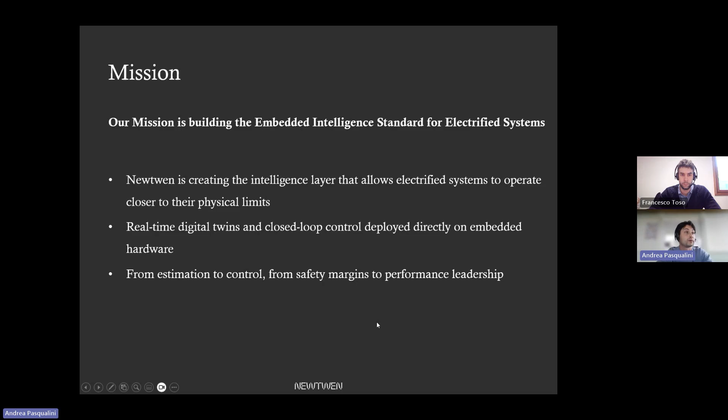Now, maybe we can ask ourselves why now? The answer is simple. Electrification nowadays is pushing everything to the edge. Power density is increasing, thermal constraints are tighter, and efficiency targets are more demanding than ever. Yet many systems are still relying on heavy derating and oversizing just to stay on the safe side. At the same time, embedded computing power has reached a level where real-time multi-physics models can actually run on microcontroller units. This combination is changing the game. Performance is no longer just a hardware problem, it's becoming a software-defined advantage.

So this is where Twin Fabrica comes in. For those who don't know, Twin Fabrica is our software platform that generates real-time, embedded-ready digital twins. Starting from CAD geometry with material properties, simulation data, and test bench data, Twin Fabrica is able to create high fidelity thermal and multi-physics models designed specifically for real-time execution inside the control architecture. Bear in mind that Twin Fabrica is not an offline simulation tool, it's built for real-time deployment.

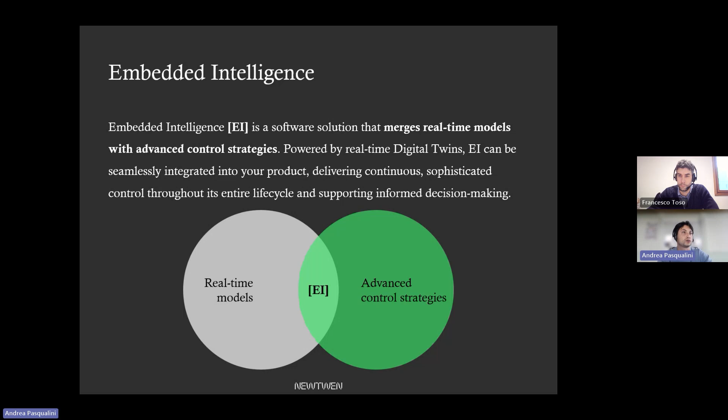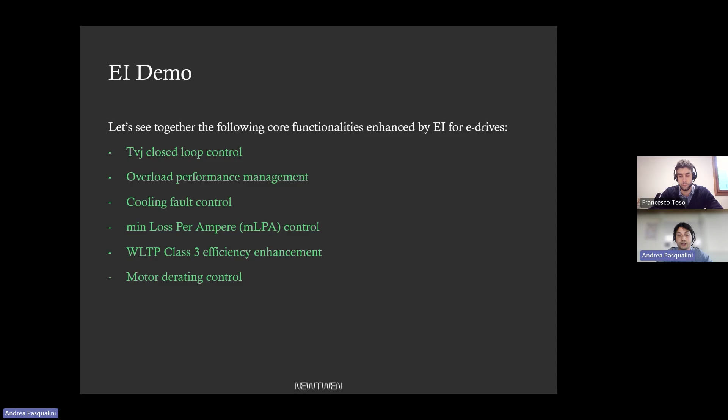Then, in the demo part of this webinar coming in a second, Francesco will show how this translates into concrete value for e-drives. We looked at closed-loop junction temperature control, overload performance management, cooling fault handling, min loss per ampere control, WLTP class 3 efficiency improvements, and intelligent motor derating control. All of this is enabled by real-time digital twins running on the edge and generated by Twin Fabrica.

Now, with that, I'll hand it over to Francesco, who will guide you through the full workflow from model generation to embedded control library, and show you how this approach can redefine motor control for the next generation of electric drives. Francesco, over to you.

Thank you very much, Andrea, for the introduction. Can you hear me well, right? Yes, loud and clear. Great.

So let's start. I would say that you have perfectly summarized what embedded intelligence is. Basically, it's a firmware layer that we implement in the microcontroller units of electric drive systems, like in this application example. It's composed of mainly two components. One is formed by real-time running models, and we will see how Twin Fabrica, the software engineering platform we have created and deploy to our customers, is used, and how easy it is to create these real-time thermal models. Secondly, there are algorithms for decision-making control in order to improve the electric drive motor control application.

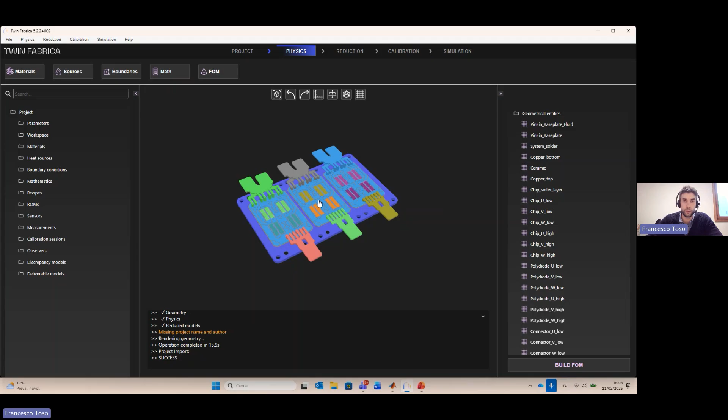So what can you do inside Twin Fabrica? We will briefly summarize all the steps reported here. First, you need to import your geometry, so you're capable of reading CAD files, and also capable of meshing your file, creating and generating the mesh of this geometry in order to perform finite element analysis.

Why perform finite element analysis? Because it's the foundational, high fidelity model that is the base of our real-time running digital twins. Unfortunately, finite element models, finite element analysis, CFD simulations - whatever high fidelity model you create - usually aren't deployable inside a microcontroller unit because of memory and computational effort needed to solve the partial differential equations related to each node of the mesh. We're talking about millions of degrees of freedom usually.

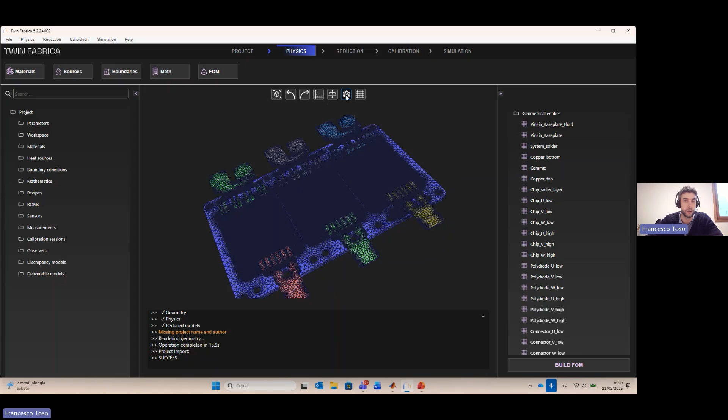So inside Twin Fabrica, you can perform a reduction. You can use our model order reduction library to compress the high fidelity degrees of freedom, on the order of millions, from the finite element based model into a compressed reduced order model, always physics based and in a state space form.

With this part of the software, in an easy way, just pressing a few buttons and setting model order reduction tolerances in terms of error and accuracy with respect to the full order model - the FEM - you can compress your model into a set of 40, 50, or 30 differential equations, depending on the settings you decide, which must be real-time suitable for embedded application. So you can execute a model inside a microcontroller unit without losing the accuracy of a full FEM.

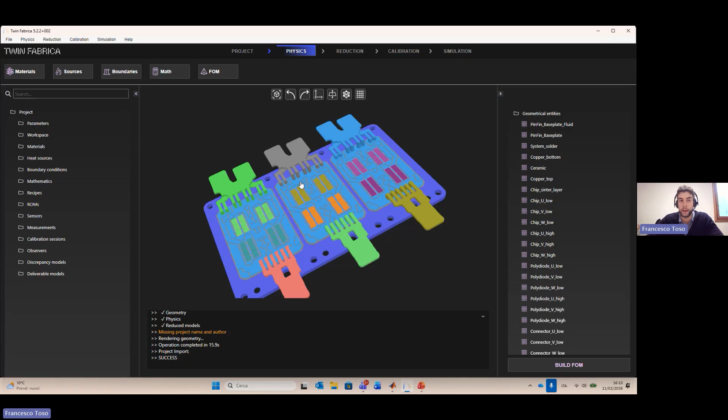But that's not where we stop - we do much more because we also calibrate. In the calibration procedure, you can import measurements like we can see here. We can import a set of tests that I can run in my test lab, for example.

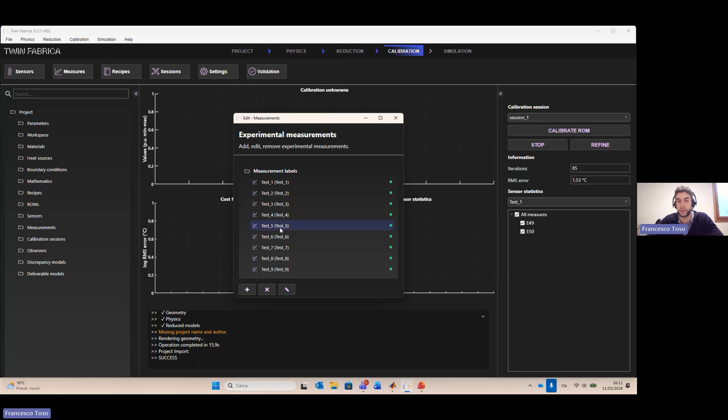Let's look at how, in this case, a test was performed using IR camera estimation. I can record the currents, DC voltages, the polydiode sensors implemented in the body diode, as well as the junction temperature recorded with the IR camera.

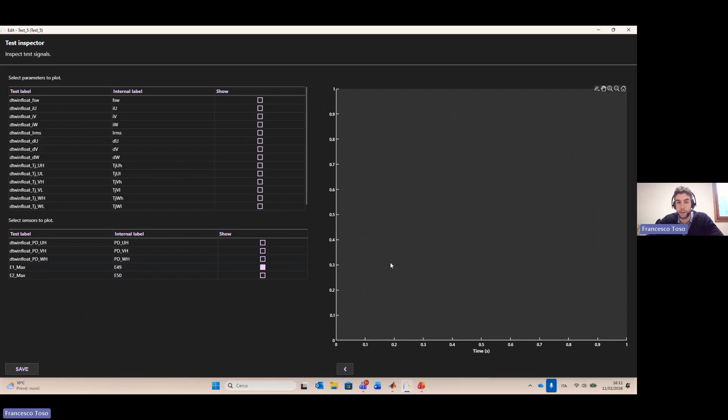I can see how the measurements behave during transient operation if, for example, I change the current level of my inverter - passing from 100 to almost 600, like in this case - I can see the junction temperature recorded with IR camera, which varies between 40 and 130.

This transient test, in this phase, is used to calibrate and enhance my reduced order model such that it can perform with very good accuracy.

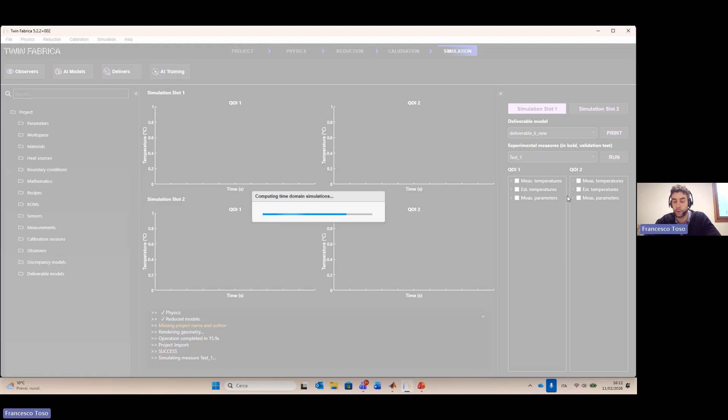If we look at test number 1, I can make a comparison after calibration between my reduced order model and my test bench data, in order to see if the degree of fidelity and accuracy of the prediction of my reduced order model is sufficient for my application.

So here I can simulate and report the test. Let's advance this one second. Here you can see the accuracy that you can achieve. If we zoom in on a certain test, we have 4 signals in this case.

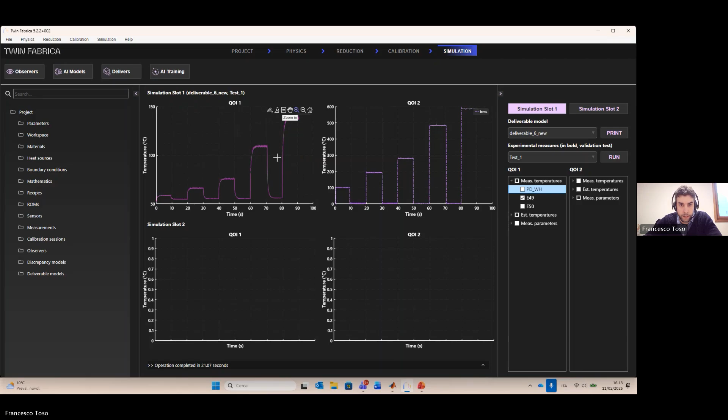Let's zoom here. The dashed line is the model, the continuous line is, let's say, better to see like this. You have a clear comparison between the real IR camera measurement and the dashed line, which is the estimation of the model.

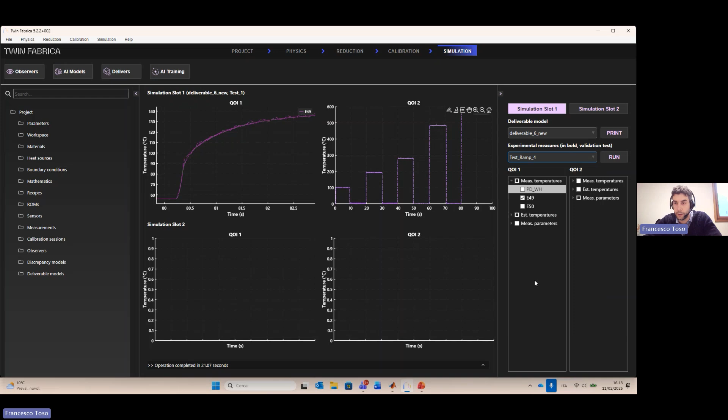You can also perform different tests between the one that has been recorded. Let's see, for example, a ramp, the classical hill hold motor start, where we can clearly see in this junction temperature, if we zoom in, the kind of accuracy between an IR camera measurement, measuring also the swing of the temperature when the frequency of the motor is low, and in dashed line you have the estimation of the model.

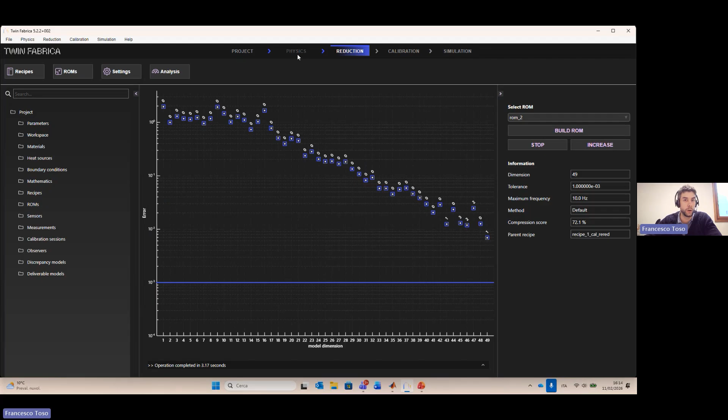Once you're satisfied with the accuracy obtained during the calibration, inside Twin Fabrica you can train AI models which basically work to correct the state of the physics-based reduced order model, which is foundational based on FEM models.

You can go back and export this final model into your platform. I can decide to export into different formats, into Simulink format, like we will see in a moment, or also as a C code function, which is plug and play into my firmware library.

So let's see the Simulink. We will export deliverable 6. We can also, for example, export it with some tests in order to have the final confirmation. If we go here and select this...

Now the software has generated this Simulink file, which I can open into my MATLAB. Let me position into this path and clear everything. I can open the Simulink.

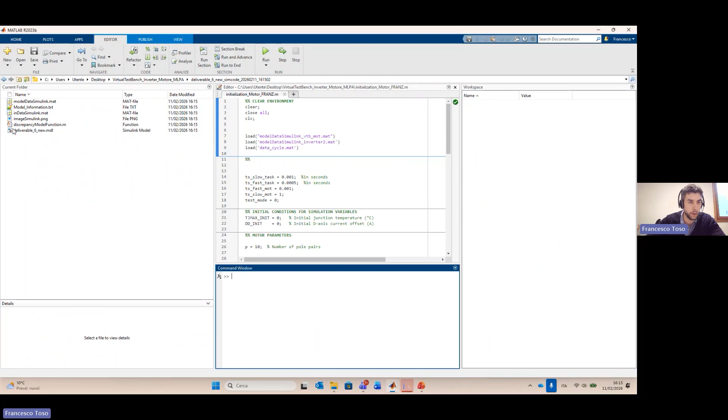Here I have the block with my digital twin exported inside. So if I run it, I will run the test ramp 4 that I have exported with. Once the Simulink has compiled...

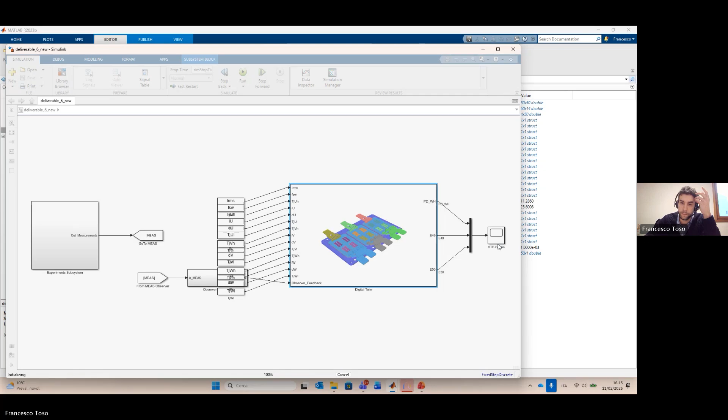I can exactly see the variation of the swings in the points that I have exported, and also how fast it is. The input and output of this Simulink block are managed directly by the Twin Fabrica interface, so for example I can position multiple sensors, not only 3.

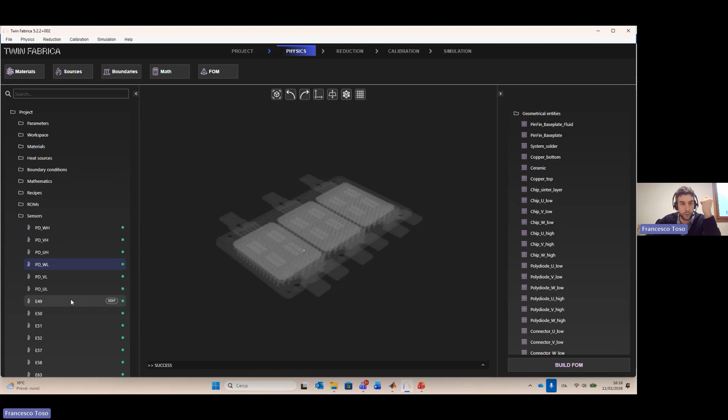I can view them directly from here. So here we have a polydiode, here we have another junction temperature, so I can decide which node of the mesh of the finite element model I want to explore.

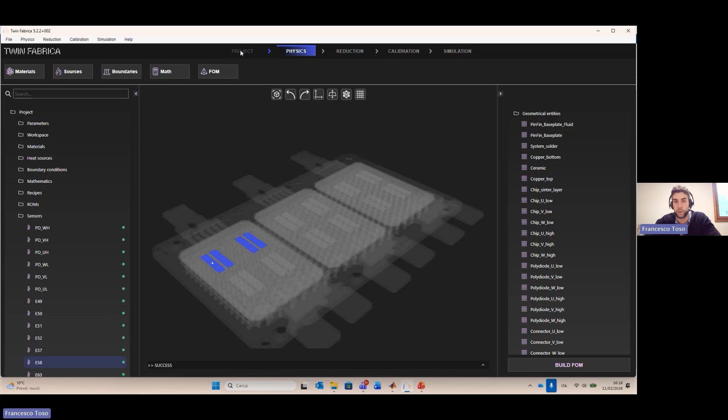I want to have the estimation of my reduced order model. I can also set different outputs and different inputs, of course, for my model. So I have many degrees of freedom to operate.

However, let's see now, if we go back to our MATLAB platform, how to use that Simulink model into what I call a virtual test bench.

Now we will deep dive together into the functionalities of the embedded intelligence and how to use them on an electric drive application. So until this moment, we have just seen how easy and fast it is using Twin Fabrica in order to create and deploy on Simulink high fidelity models, also calibrated with real experiments.

In this block, I can simulate both the inverter and the electric motor under test. This inverter and electric motor model, as you can see, have quite good accuracy respect to the real test bench experiments, because they have been calibrated using the real test bench experiments.

Now I have my electric drive control schematic. Usually it's composed of a slow task controller that could be a speed control or a torque control, independently of what your specific application case is. There's also the classical current controller with the space vector PWM strategy that you can change. So here is the classical electric drive schematic.

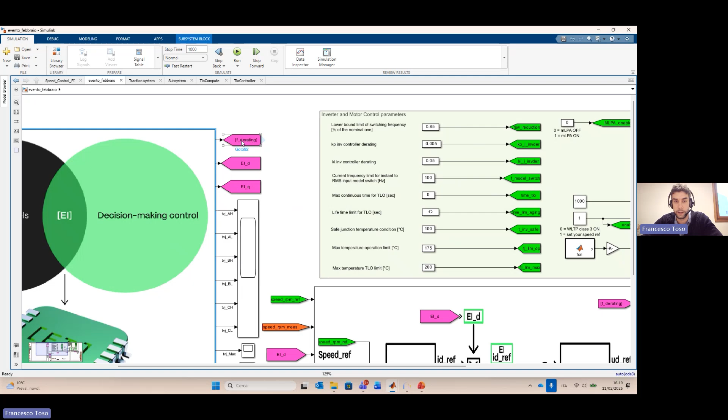And also you have control algorithms that are calculating 3 variables. One is the frequency derating, which is basically a scalar factor that will be connected within your reference switching frequency for your electric drives. Why is this important? It's important for derating purposes. We will see in a moment for the inverter.

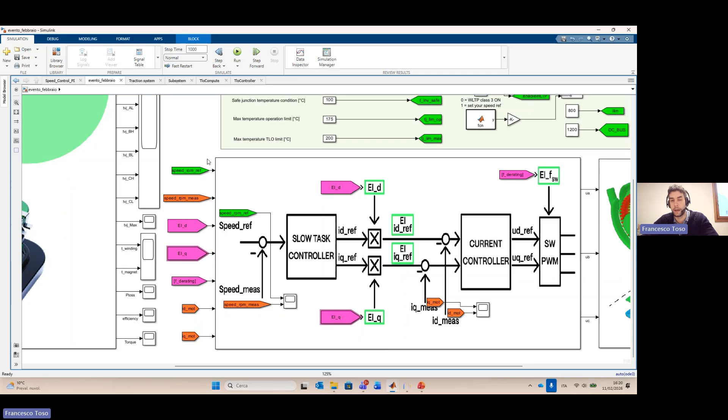And then we have two other scalar values that we have called EID and EIQ, which basically multiply the reference of ID and IQ coming from your slow task controller. Why this? Because, of course, it's for regulating the current, changing the current point in order to enhance the efficiency of the motor, the derating of the motor, and also the derating of the inverter, controlling the conduction losses. So let's see step by step these points stated in the previous presentation.

Let's start on how to simulate and how to see the embedded intelligence control layer is capable of controlling directly in closed loop the junction temperature of the inverter. So coming from here, we can decide to simulate, apply a certain reference speed, and if we press play, now simulation is starting. So what are we looking at here?

Here we have, we can change the coolant flow, we can change the coolant temperature, the ambient temperature, the switching frequency, the limits for the insulation of the motor, the magnet of the motor prediction, and so on and so forth. We have the calculation of the energy loss during the entire cycle.

However, now we are asking for a certain speed, 1000 RPM like in this case, and the controller is following it. So our speed control loop has followed the reference speed. Here we can clearly see the junction temperature estimation of our six inverter switches, which for that kind of coolant flow and coolant temperature are at 120. Of course they are increasing because the temperature of the coolant is increasing, and so on and so forth.

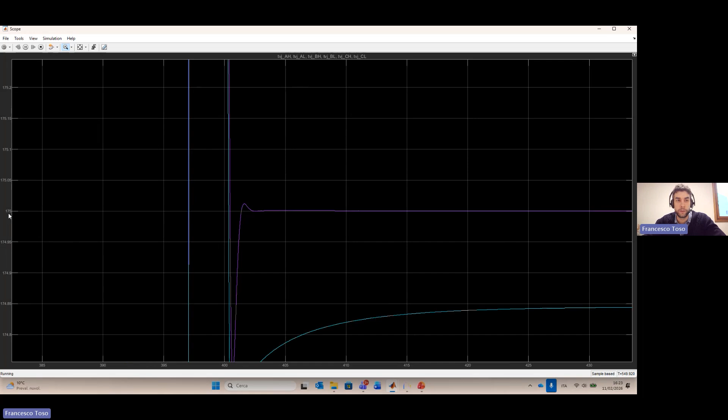However, once I say that it's a closed loop control, it means that if I want to change the maximum temperature operation limit, and maybe I don't feel confident with 175 and want to go with 150, for example, my controller is limiting the maximum junction temperature to the new limit, that is 150.

So it's a closed loop control, such that I'm changing the current by means of these two, EID and EIQ, which are changing the reference for the current control, such that the maximum junction temperature of my inverter is safely regulated within the operational limit that I have set.

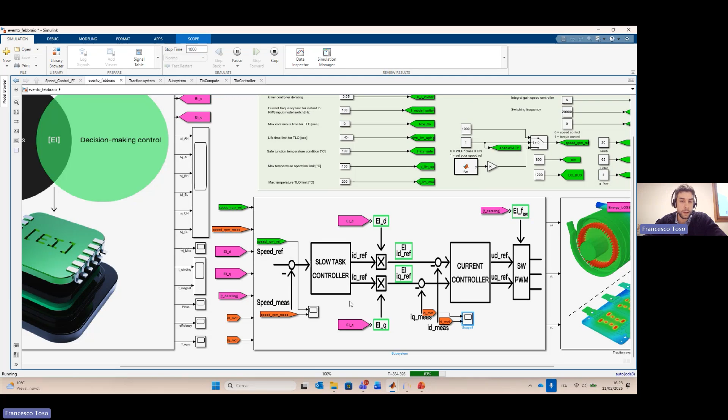Of course, what I'm doing is losing current, so I'm decreasing the torque of my electric drive, and for this reason I'm also not following the speed anymore. So if before, with that cooling condition, I was capable of reaching 1000 RPM, now with the derating, of course, I'm not capable of achieving that speed. If you see that the speed is going down, it's because this...

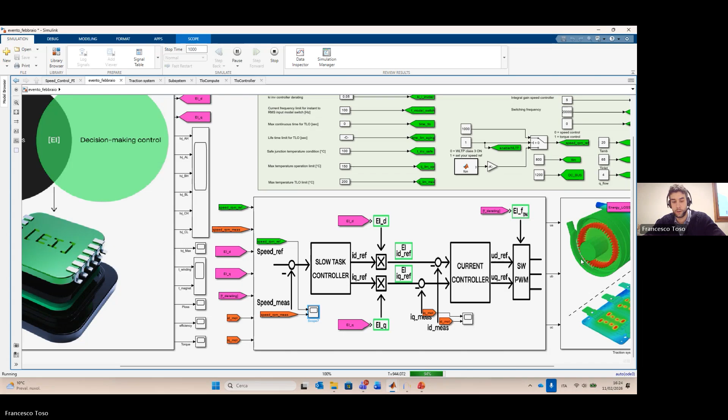This motor has, of course, the temperature dependency of the flux. And since if I go to the digital twin here and look at the magnet temperature, of course it's increasing - the magnet temperature, which is the blue line here - the flux is changing. So with the same current, which I'm limiting because of the derating of the inverter acting, I'm not capable of holding that torque, and I'm losing the flux because the magnet temperature, of course, is increasing.

So it's a very advanced control architecture. And this is how basically we regulate the current and the switching frequency such that in operation, in the nominal condition during continuous operation, my maximum junction temperature is within the limit that I have set.

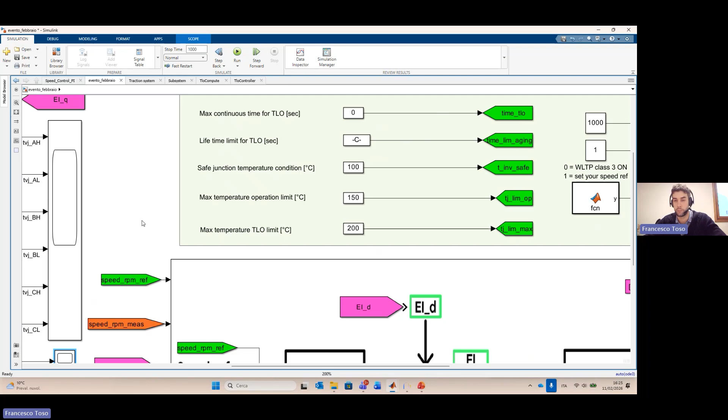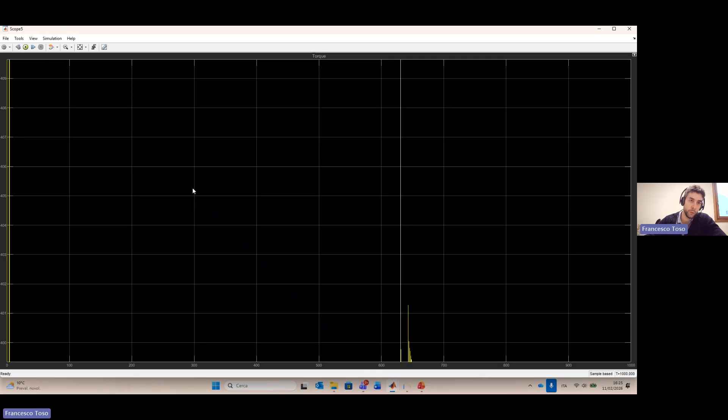Now I would like to see with you what it means to change from 175 to 150. So in this case, 25 Celsius degrees of safety margin, under a certain cooling condition. What does it mean in terms of torque? Fortunately, with the digital twin, we also have in real time the torque estimation.

So here we can clearly see during this transient that we have passed from a torque of almost 470 to a torque of 388. So we have lost more or less 80 Newton meters on 400, so almost 20% of the torque that has been lost. Because of what? Because of just a safety margin imposed in my derating strategy on the junction temperature.

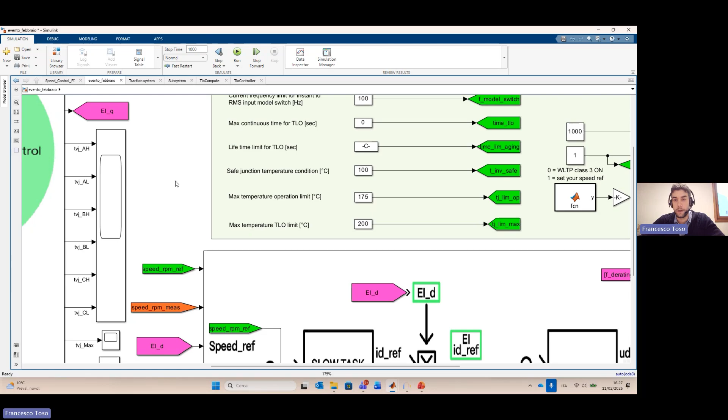In the state of the art, usually you don't have a real-time junction temperature running in your electric drive with high accuracy like the one we've created in Twin Fabrica. So usually you're using a safety margin of 150. What does that mean? With electric drives capable of properly estimating the junction temperature, and most importantly controlling it directly with closed loop control, you can safely operate your inverter within the maximum temperature operation limit stated by the supplier's datasheet. So you can basically increase the nominal torque for whatever different cooling condition you have.

Now let's see the other functionality in the list. The next one is overload performance management, or what I like to call time limited overrating control, TLO. Let's impose certain conditions for the cooling: 6 liters per minute of coolant flow rate and 55 Celsius degrees for the coolant temperature. Now let's see, for a transient 15 second acceleration cycle, how our controller behaves.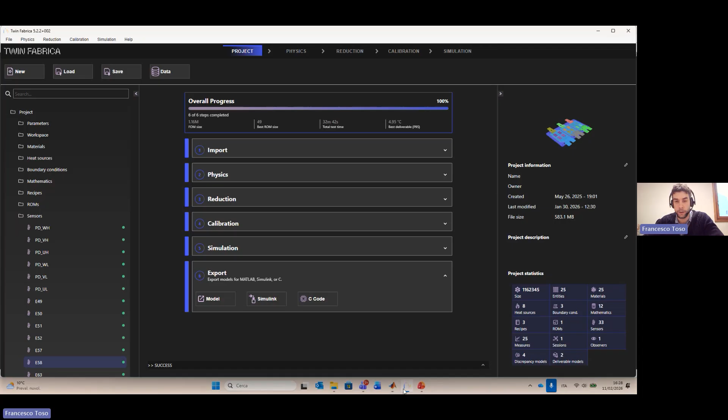The simulation is very fast right now because the time is short. Here you can see the classical TLO. I'm starting with my electric motor at 0 speed. This means I have continuous current for the first instance, just like on one single switch of the 6. With my digital twin I'm capable of predicting the temperature with accuracy for all 6 switches, so I'm confident in the estimation, and this estimation is also confirmed by the IR camera measurements in this simulation.

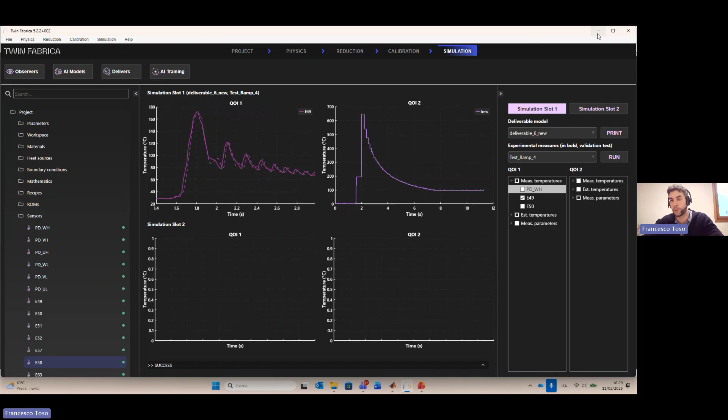It's very similar, this kind of hill hold motor start, when speed starts from 0 and increases with a certain ramp. Now what I have to do is basically limit the current such that I fastly regulate the maximum junction temperature within 175 Celsius degrees. So in these conditions, I'm achieving the target speed in more or less 3.17 seconds.

Now if we go back here, in the datasheet of my power module it's also written that I can stay for a cumulative amount of time, more or less 100 hours, in an overload or overheating region, between 175 and 200 degrees. However, in my application, let's say a passenger car, I want to guarantee a certain number of acceleration cycles during the life of the inverter. So I calculate that for a unique acceleration cycle, I can stay no longer than 3 seconds within this overheating region. This means that for more than 3 seconds I'm not allowed to stay with the inverter hotter than the maximum operation limit, which directly translates into increased acceleration and torque performance, meaning increased peak current duration.

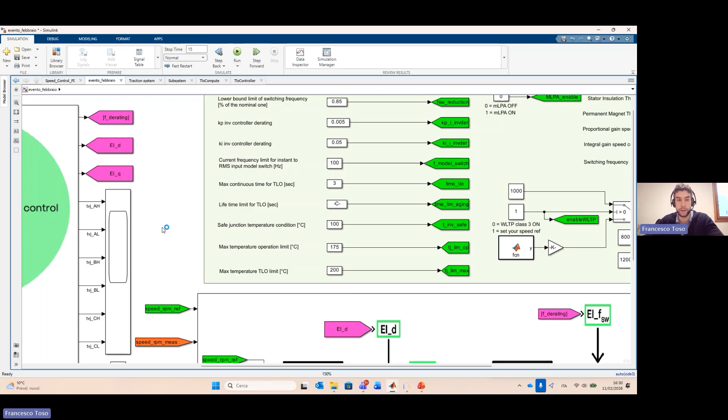Let's see if it's true. If we go back here and press play, we should see that I achieve the target speed - the acceleration has been increased because now I reach 1000 RPM in more or less 2.50 to 2.51 seconds. So I've increased by far the acceleration performance from 0 to 1000 RPM for my electric motor. How? Thanks to the TLO.

So if we go back here, now my algorithm allows me to stay for 3 seconds within 200 Celsius degrees. And if I go back and look for the current, in fact during the first instance I'm asking for the maximum current, which is 800 amps. This is very important for overload management.

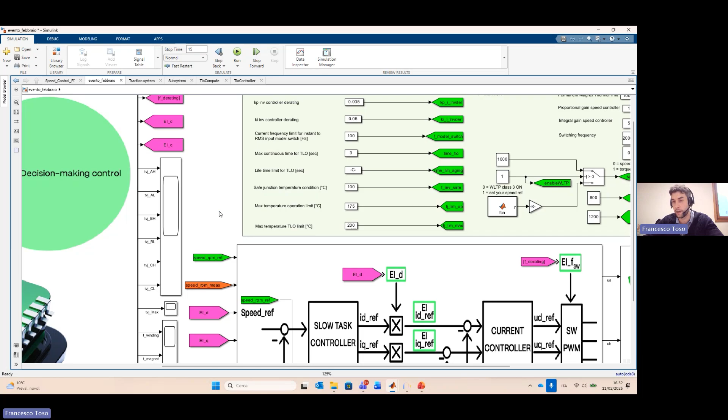By regulating how much time I can stay within the limit and regulating the overheat region, I can increase the torque performance and acceleration performance of my electric drive, which is a relevant KPI for electric motors, mostly in automotive applications.

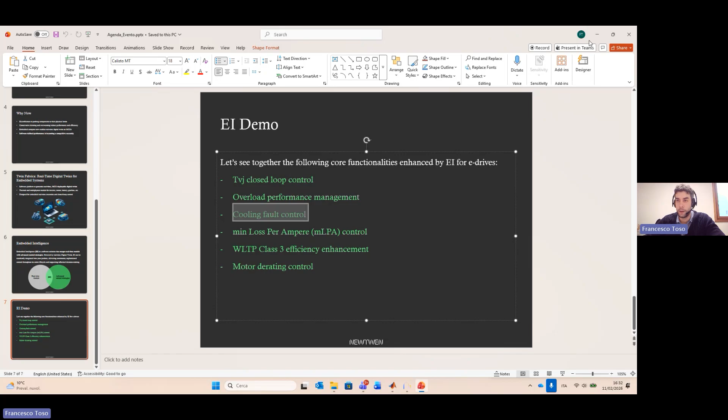Now, if we go back to our list, performance matters, of course, but also safety. Safety is another important KPI. Usually one of the faults sometimes involves the inverter in an indirect way. What does that mean? It means you can have a fault in the coolant system - maybe the pump, maybe a loss in the pipe, whatever - and you're not capable of guaranteeing the nominal liters per minute and the nominal inlet temperature for the cooling of your electric motor and mostly of your inverter.

So what happens? Sometimes you have NTCs or polydiodes or diode thermal sensors implemented in your inverter. Of course, the dynamics of this sensor is not in the junction, so it's very slow to arrive to, I would say, a dangerous limit. So it's too late basically to cut off the current and to save the inverter, which has a very fast temperature dynamic, as we have seen. And you need to protect it by a fault that is in the cooling, it's not the inverter.

So now, with this virtual test bench, we can also try to replicate this condition. Let's increase the seconds of the simulation. Now, with this condition, let's start with the standard conditions here. We can see everything is going fine. In theory, my speed has been achieved.

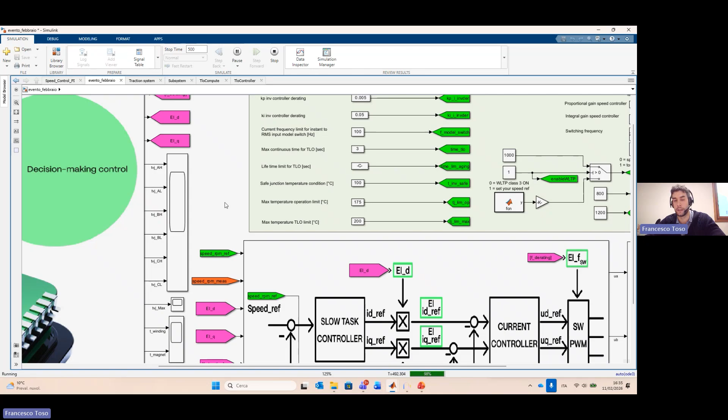Of course, my electric drive cannot perform the reference of the speed because I'm in a fault condition. However, what I'm preserving is the continuity of the service, because I'm not putting the current to 0, but I'm regulating in a closed loop control the current reference such that during this condition the inverter operates at 100 Celsius degrees.

Which means, if you go to the torque or to the speed, that with the same let's say inertial and viscosity load, instead of 1000 RPM I can go to 270, okay, but with the junction temperature that it's safely controlled to 100 Celsius degrees.

So my inverter is safe, and with this slow temperature I can arrive to, I don't know, a station in order to recover my fault in the coolant. So the continuity, the preservation of the service, and the enhanced safety thanks to the embedded intelligence control on top of the motor control drives, of course, is one relevant KPI that our digital twin-based control offers.

So, going on with our list of features, until here we have been focused on the inverter, which of course is the actuator for controlling the motor. Now we can focus on the motor.

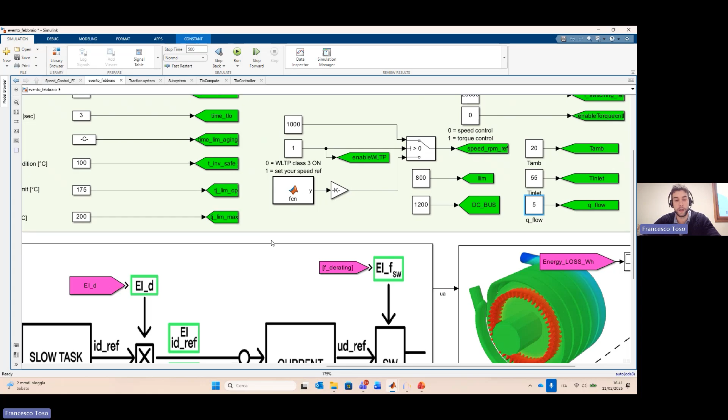Now we can enable or disable with one unique parameter our min loss per ampere. Let's start with the MLPA off, so basically I'm not changing the references here. Let's enlarge a little bit the simulation time.

And if we go - here we have our speed reference that is completely followed, and I also have my torque to achieve that speed, which is more or less 524. Now I also have the power loss calculation here. So with that ID and IQ, I have a certain power loss total for the electric motor, and it's calculated in real time.

Of course, it's increasing. Why? Because the winding temperature is increasing and the magnet temperature is increasing as well in this operating point.

So now let's see what happens to my reference currents when I enable the MLPA. Now that I have enabled the controller, what happens is that the speed is always followed, so I'm always at 1000 RPM.

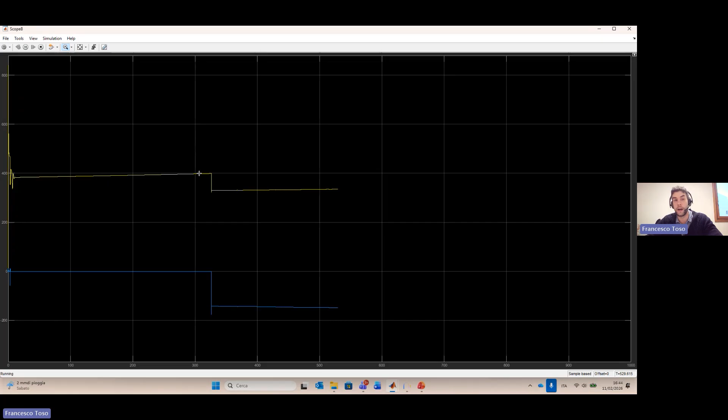The torque is always the same - apart from the small transient here, I'm asking basically for the same torque level. But what has changed? The current point has changed. Before, without knowing anything, I was controlling my electric motor with 0 direct current and a certain IQ, a certain quadrature current. But now my embedded intelligence algorithm has completely changed the operating point and has positioned itself quickly in a new point such that it has minimized losses.

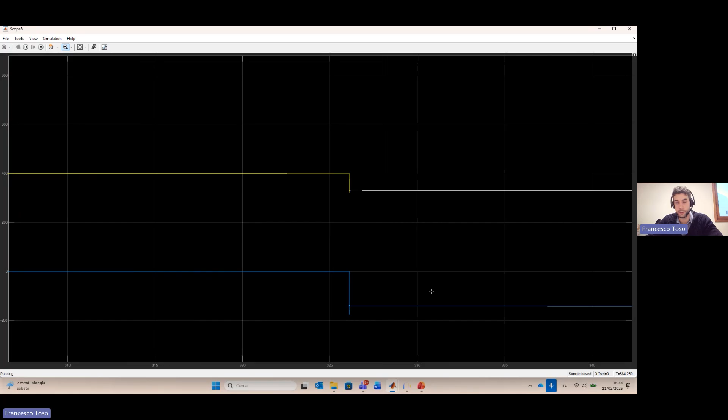So let's stop the simulation and see what happened to the power loss calculation during that transient. During that transient, my power loss calculation, which of course continues to increase because it's the temperature of the magnet and of the winding that's increasing, so it's temperature dependent.

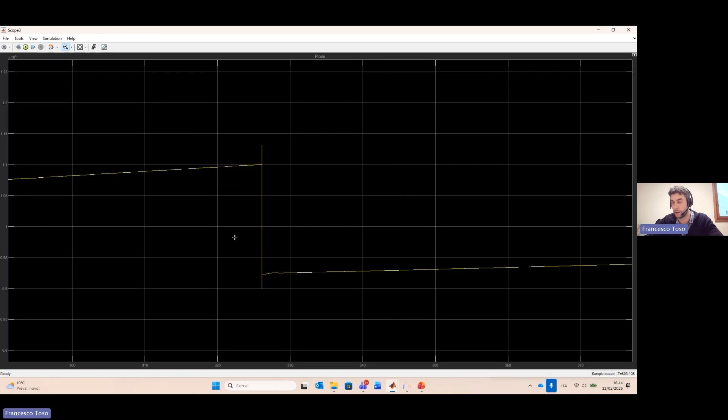However, here I have saved a lot of watts in terms of losses - sorry, not watt hour. So in terms of efficiency, if we want to calculate this as well, we have saved efficiency too. It's going down with the temperature that's increasing. However, here we have saved more or less 2 points of percentage, just by changing the reference of the currents, while holding the same speed and the same torque.

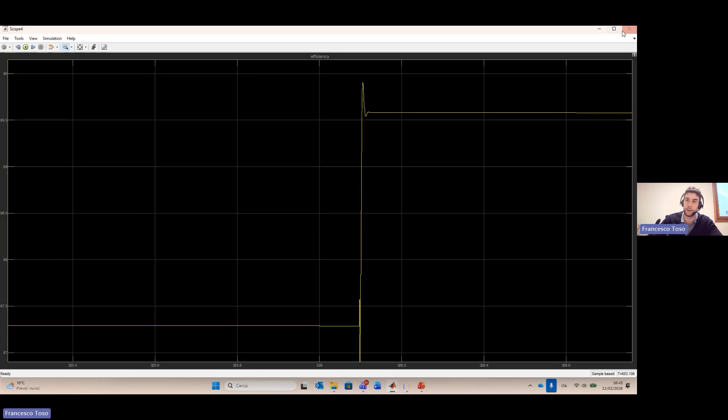Now we can see what happens if we scale this. Let's change this, for example, to 60, and let's go for 6 or even 8 liters per minute - the nominal flow rate for the coolant.

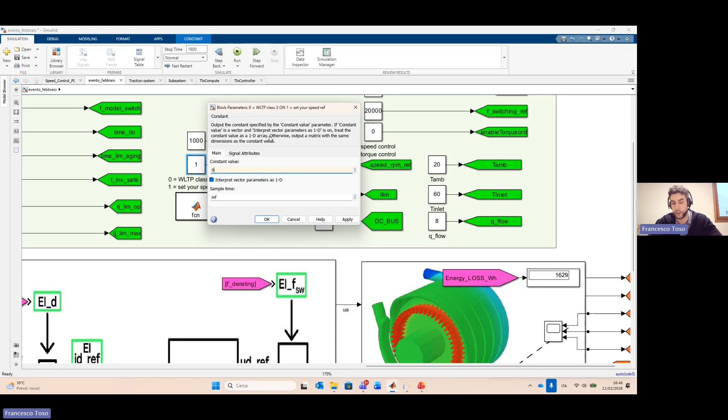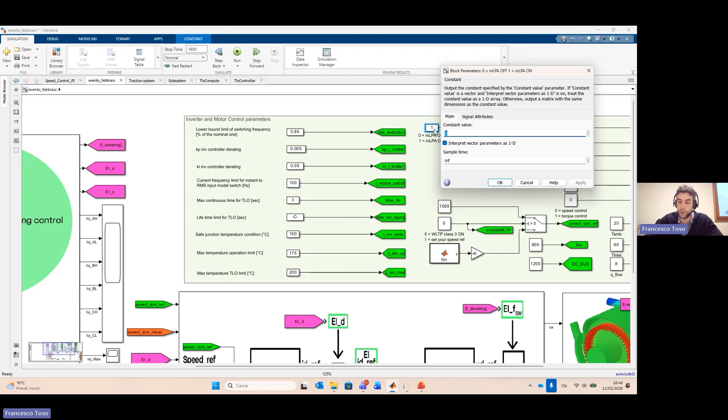But now we start a new profile - a WLTP class 3. So now we are still controlling everything in speed control, but the reference will be a WLTP class 3 cycle for the drive. Let's start the simulation without using our min loss per ampere control - just the classical electric drives, imposing the ID current equal to 0.

Now, if we play, what we will see is that the new reference is no more a constant, but it is a WLTP class 3 cycle. So you have the urban, extra-urban, and highway cycles during half an hour, more or less, that our control is following. We are also imposing some torque load in order to achieve that speed, a quite realistic torque profile for a WLTP class 3 cycle.

If we have a look at the junction temperatures of our inverter, it is quite cold with this coolant condition, and with the WLTP class 3 cycle, we are accelerating and decelerating, but we are not racing a Formula One, we're not driving a Formula One race in this case.

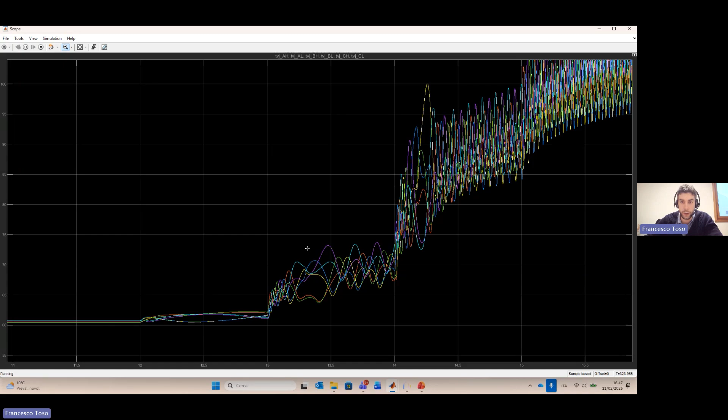If we have a look, you can see clearly the 6 junction temperatures. You have the accelerations, the swings of the temperature in different profiles, and so on. So the digital twin can really give you a quite real-time overview of your electric drive. That's the reason why more insights means more control, and more control means more performance and safety.

However, here it will take a few minutes, because simulation is long and we are performing everything. So there is the electromagnetic motor running, the thermal model running, electromagnetic and inverter models running, the electric drives with the speed control and current control algorithms, and also the embedded intelligence block, all running in real time on my laptop, which is not super powerful, let's say.

Here, we have all the details. We do not change right now the temperature inlet and the coolant flow, but you can do it. So you can basically simulate these cycles for different cooling conditions, different ambient conditions, different temperature conditions, different switching frequency, and so on.

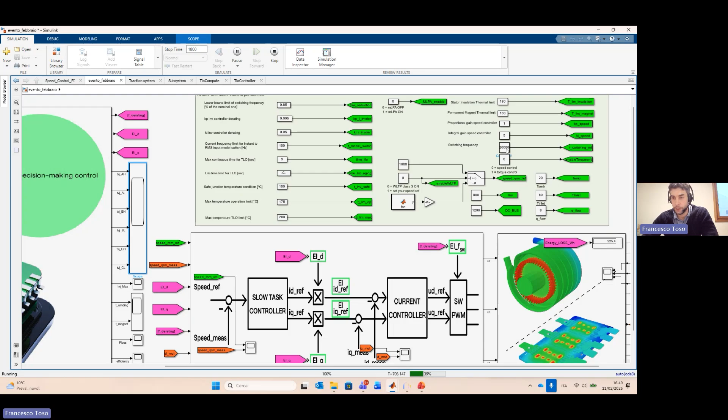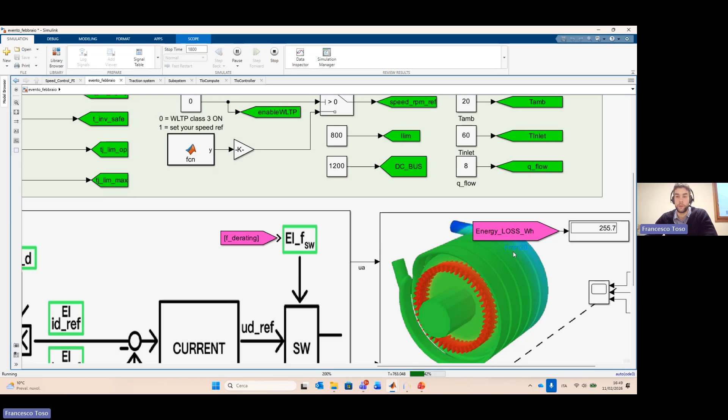However, in this moment, it's not the scope, because we want to calculate the total energy loss, in watt hour, that our electric drive is actually spending, so the total energy losses, in order to perform this WLTP class 3 cycle. So it's not the total energy, but the total energy loss, the sum of the losses of the electric motor and the inverter.

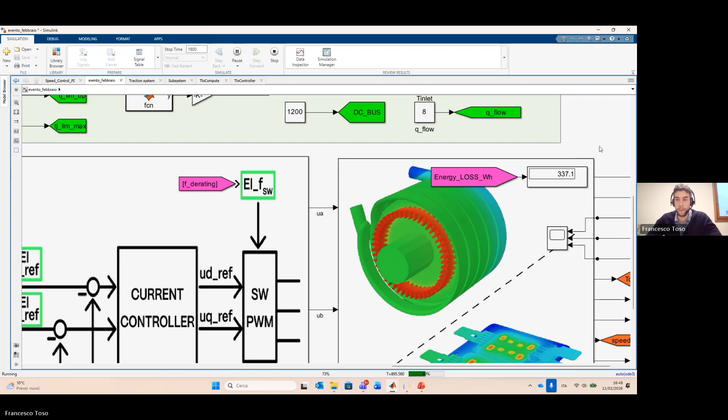If we wait a little bit, we will see that at a certain moment this energy loss will stop when the simulation will stop, so after having simulated 1,800 seconds, which is the duration of the WLTP class 3, and this will stop at a certain value.

And we will see that if we repeat the same identical test, with the same cooling condition, the same speed references and the same torque load, but using the MLPA control powered by the embedded intelligence, modifying the current references, you will see that you have a very good saving in terms of energy. And this energy saving is directly translated into what? It's directly translated into extension of the range capacity of the vehicle.

Or with the same identical range requirements, you can save on the cell. So if the watt hour here is considerable enough in order to save one or two cells in a battery pack, it's a good cost saving in terms of bill of material, because we know that the battery pack is the most expensive component in a vehicle, and the cell is quite expensive as well. So if we can save a couple of cells, we are saving euros in orders of tens, not cents, not cents.

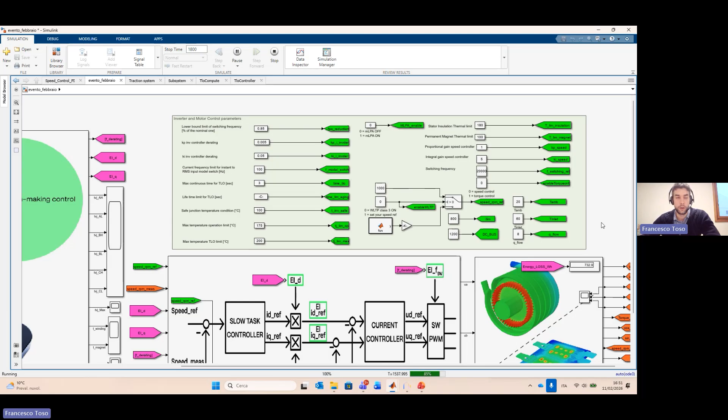So let's also have a look at the temperature of the winding and the temperature of the magnet. Of course, during a WLTP class 3 cycle of just half an hour, it's normal that I'm not overheating my system. However, later, not in the next one, but in the last test, we will also see how the derating for the motor is quite advanced.

It will be a cascade derating that is taking into account simultaneously both the temperature of the winding and the temperature of the magnet, because winding is very relevant for safety reasons and for the insulation class. But magnet is quite relevant for preserving the efficiency of the electric motor.

However, simulation has finished, and the total energy loss is 1.1 kilowatt hour.

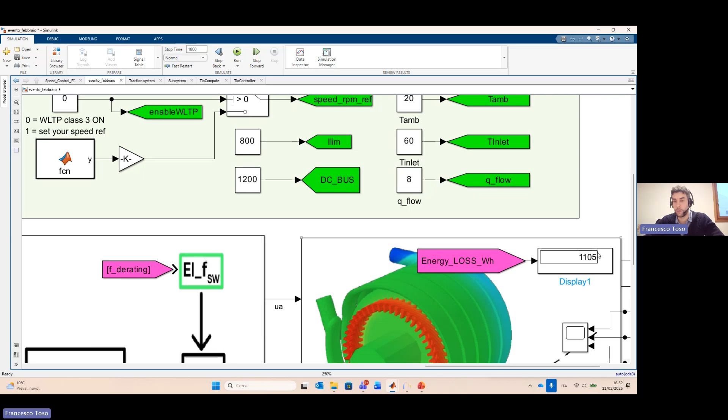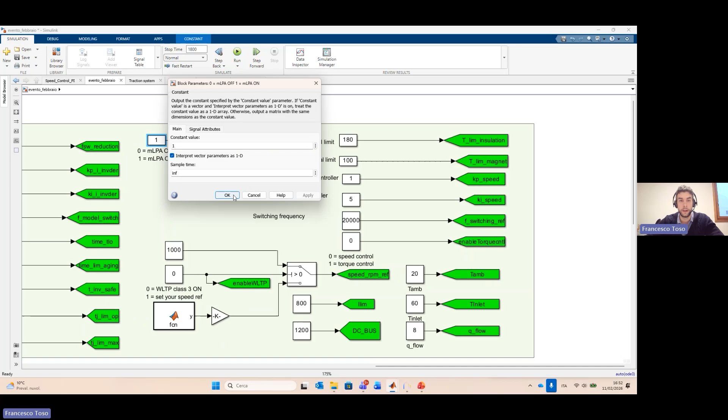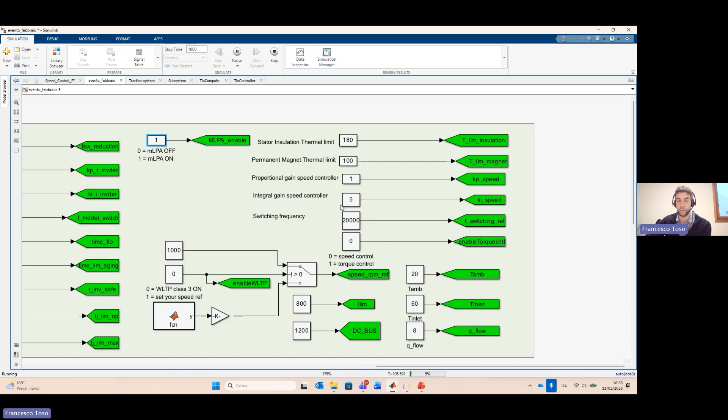So let's remember this number, because we will repeat the entire WLTP class 3 cycle with the same identical speed and torque references, but now using different current points that are dynamically calculated, also based on the magnet temperature estimation, as well as the electromagnetic model of the digital twin generated, calibrated, and deployed by Twin Fabrica, in order to calculate at each time instant, each 1 millisecond, which is the rate of the firmware where this code is running, the variation on the ID and IQ reference of the standard motor control.

In order to improve the efficiency of the electric drive in a dynamic way, I would like to highlight how this block is really easy to implement, because basically it is a function which inside has the real-time running digital twins that are giving you all the enhanced information about total losses, the torque, the efficiency of the motor, the temperature of the motor winding, the temperature of the magnet, the six switches temperature of the inverter.

In order to have this information and inside having a closed loop PI controllers, basically, on cascade, on a particular structure, that are regulating the current reference such that the limits on stator insulation, permanent magnet temperature limit, maximum operating junction temperature for the inverter, the safe junction temperature condition when there is a fault, the maximum temperature limit overall when you are in an overload performance that we have previously seen, they are dynamically regulated, completely independent, completely independent by the cooling condition.

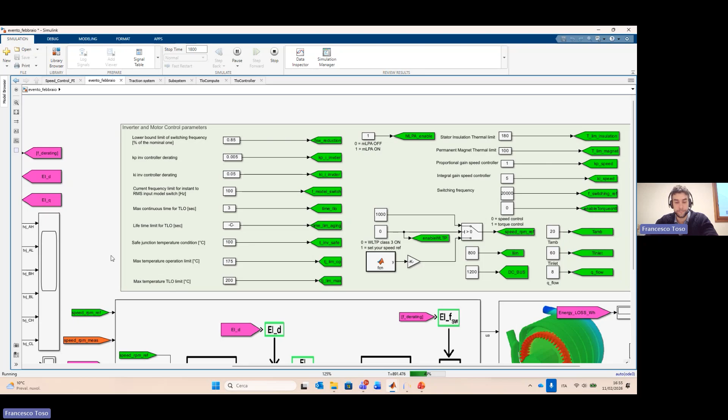Say that, we can always see the WLTP class 3 cycle that is running. So I'm following the speed reference here. We can see the torque generated by the motor. It is completely identical to the one when the MLPA is disabled. So when I'm using the standard classical electric drives, even if I'm basically using my IPM like an SPM, why? Because there is a PI controller that is regulating the torque, but the efficiency, so the losses, we will see can be improved.

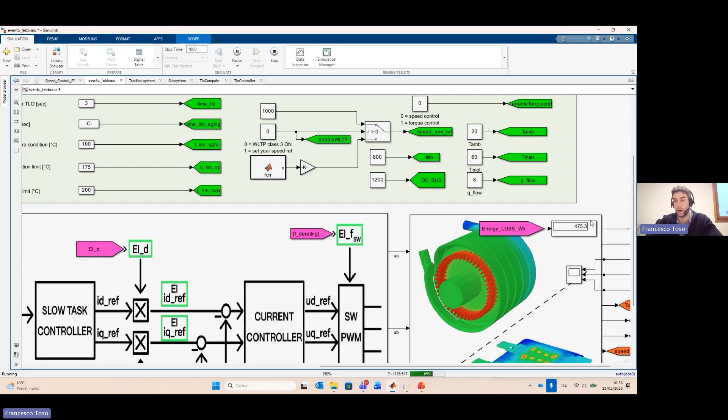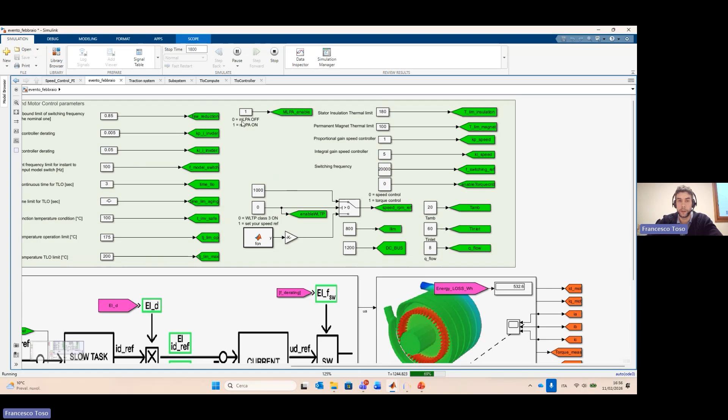Remember that at the end of the cycle, the total loss calculation was 1.1 kilowatt. So let's see, after this half hour of driving cycle, what will be now the new energy loss calculated, only changing the ID and IQ references. So basically only performing the MLPA algorithm that is inside the embedded intelligence.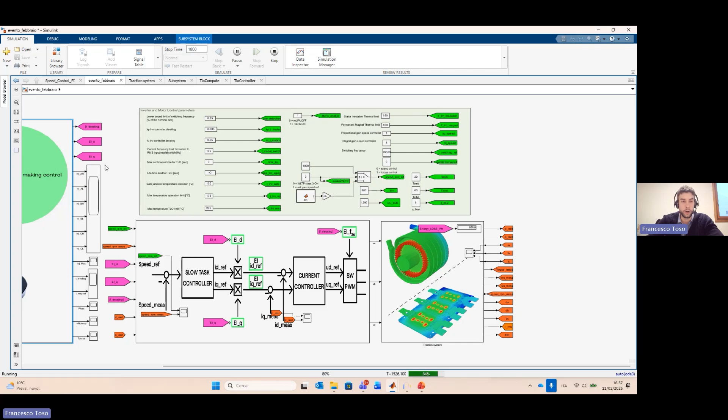For giving you some practical numbers in terms of memory and computational effort of this firmware layer, which is encapsulating all the functionalities, all the closed loop controls, and all the digital twin models that are estimated in real time, all these variables that usually you don't have with the state of art hardware sensing inside your electric drive. In an Infineon TC3H7 microcontroller, which is a standard in the automotive space, this code runs in less than 50 microseconds, quite suitable for the 1 millisecond implementation task because it's less than 5%. And the total memory for this functional block is less than 70 kilobytes. So very, very light model.

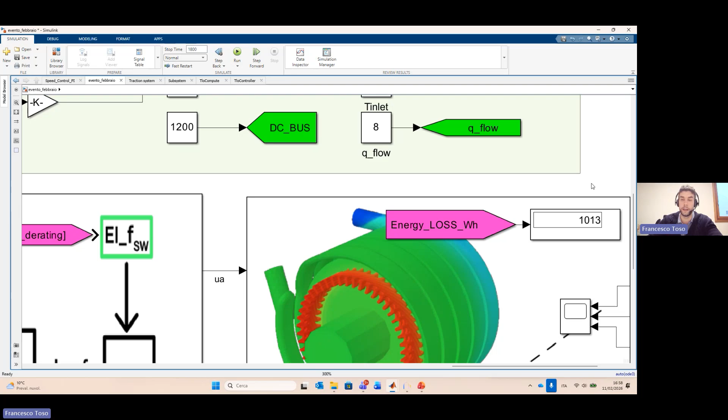That's almost finished. We have the final accelerations here. So simulation is running, and we are saving more or less 90 or 87, whatever, watt hour, 90 watt hour. That for a unique single WLTP class 3 cycle, it's a lot. So basically, it's a very good saving.

Why? Because the electric drive is changing the ID and IQ current references in real time in a dynamic way, such that you serve the torque of the load condition in order to achieve the reference speed, of course, but minimizing in the real-time strategy the total losses for the electric motor.

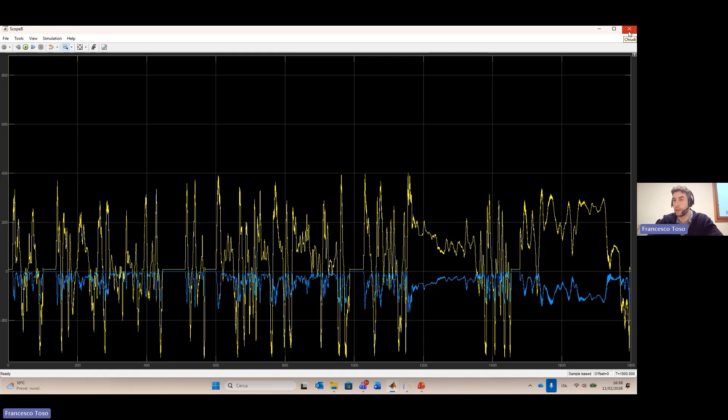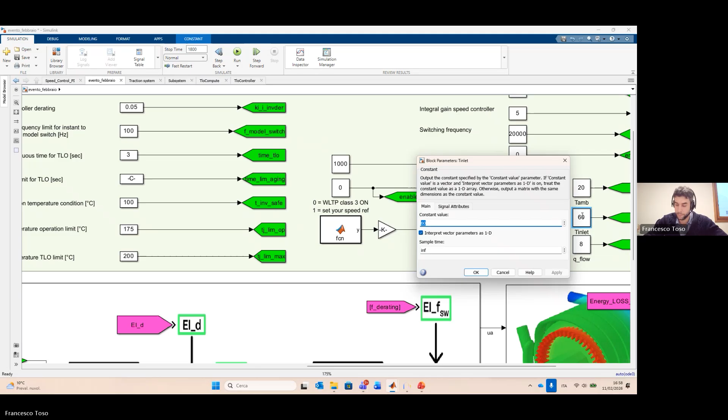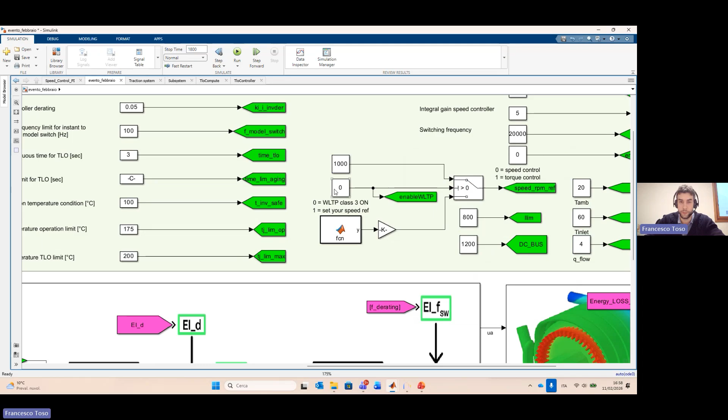Now, to finish, we can set a very, let's say, I would say very high here, very low here. And we can see, if we go back to our state, the final derating. So here we can see how we will manage the motor control. So the motor temperature, no?

The insulation class, usually the limit is 180, no? For preserving the insulation of the windings. Now we are asking for a very high torque in the electric motor, and it's a continuous operation point. That's the reason why the temperature is increasing in a regular fashion here. And the magnet temperature limit is 100 Celsius degrees.

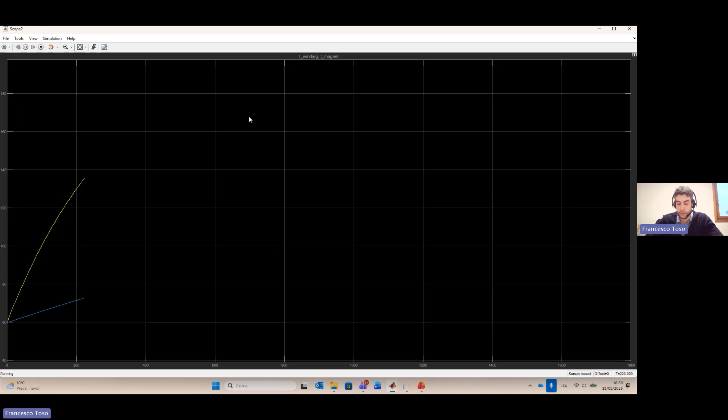We know that the dynamic of the rotor temperature usually is quite slower than that of the windings. However, it's very important to predict the magnet temperature, mostly because it's much slower with respect to the stator.

When I switch off my car, for example, when I park and go to the food shop for a few minutes and then restart, maybe my stator is already at a very low temperature, but the rotor is still very hot. So with on-off, on-off, on-off conditions, what happens?

It happens that the magnet temperature is always starting at a hotter point, and so it's not so difficult, mostly in automotive applications, that the magnet temperature basically achieves the limits that are jeopardizing, basically compromising, the efficiency of the motor.

Because if the rotor magnets are overheated, you lose the flux, and this loss of flux is irreversible. It's an irreversible process, and your electric motor, with the same current, can now give less torque — that is what basically compromises the remaining useful life of your electric machine.

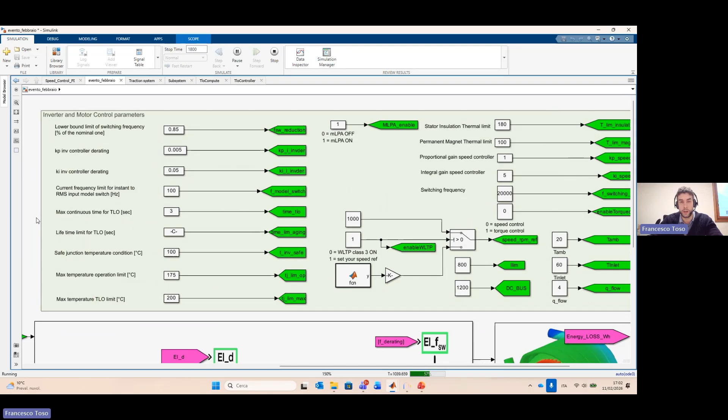These are limits that, of course, the user can change. Whatever parameter is here, the user can change it, and it's automatically set in the library of the firmware. So if you want to use some safety margin, you can always do that.

However, the algorithm, as you can see, first changes the operational current point, and now it's still changing it, because if we go back to our digital twin temperature, I was reaching 100 Celsius degree, and the new current operating point is slowing down such that I do not overheat my magnets.

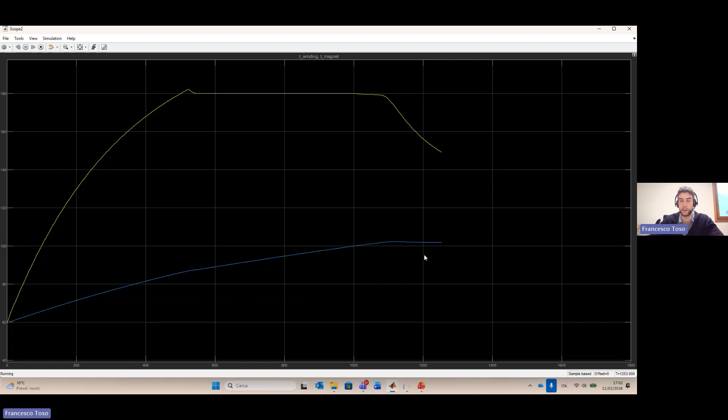Doing this is not an easy task, because the dynamics of the magnet are quite slow, and you need a predictive controller inside this in order to calculate the final steady-state current level of ID and IQ, such that I preserve my operating condition, of course at a lower speed.

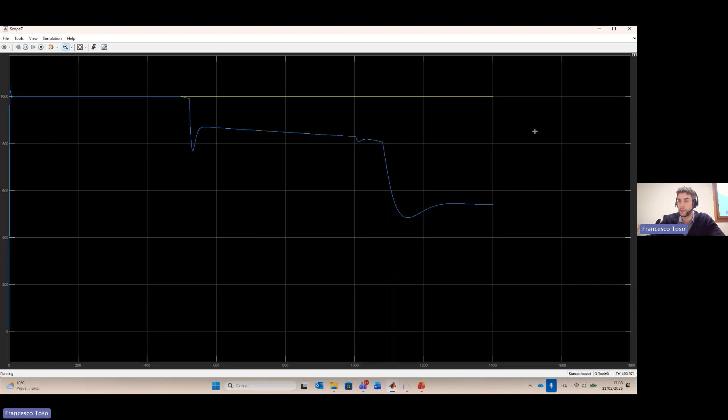Because I don't have enough current for my motor, since I'm risking overheating, for safety reasons. But I'm still preserving the continuity of the service while preserving the life of my electric motor. So even the lifetime of your electric drives, using the embedded intelligence algorithm, is enhanced, improved.

That's it, I will stop here with the presentation. We have covered all the points, because you have also seen the WLTP class 3 efficiency enhancement. It was the slower task to see, because we had to wait half an hour, and then another half an hour of simulation of the entire WLTP class, in order to observe the efficiency preservation during this cycle.

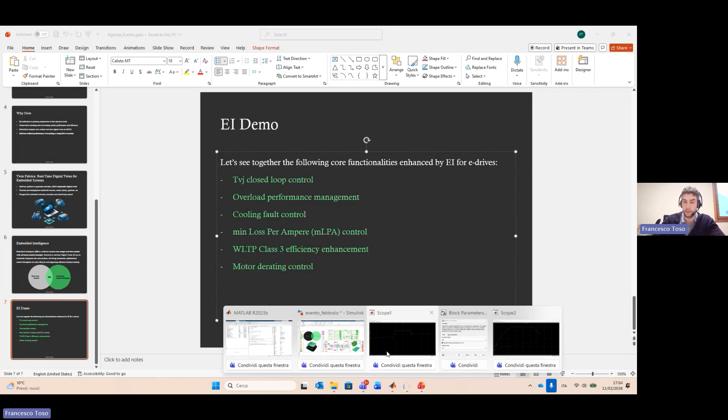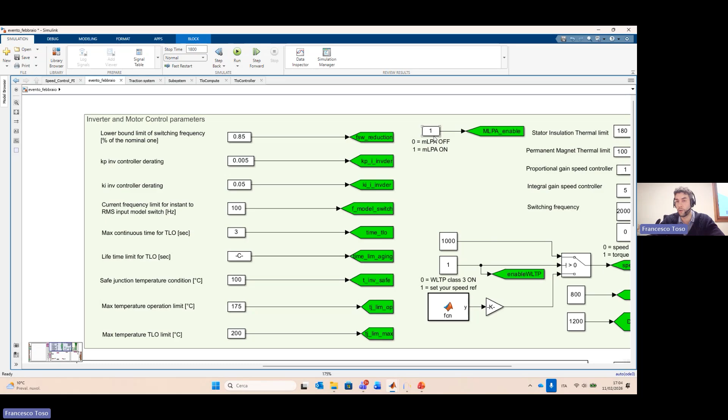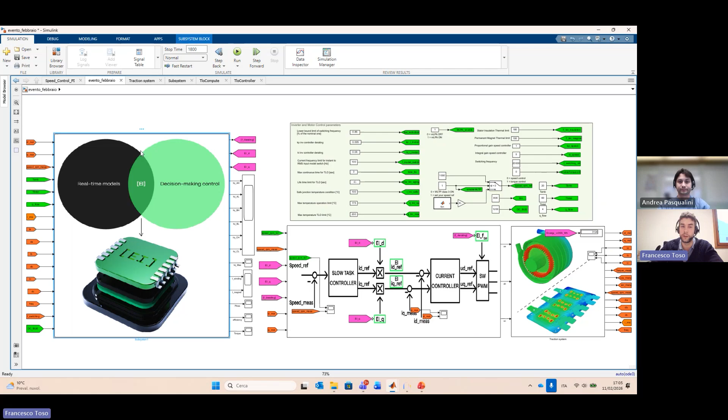The good thing is that when you try this kind of electric drive architecture, it's very easy. You use Twin Fabrica, you use the embedded intelligence. You integrate it just by adding these three variables within your motor control, whatever you have, and you can perform the same test that I have performed here in Simulink, in your test bench, using on-off, MLPA, different safety margins, basically disabling and enabling the embedded intelligence algorithm, in order to measure the added value that this piece of firmware adds to your motor control.

So we have a question from Peter: What level of visibility does the embedded intelligence model provide, and to what extent is it explainable? What customization capabilities are available? Is it basically a black box model?

Very nice question. Actually, it's not a black box model — you can see it both at the firmware level and also inside Simulink, so you can also customize it if you want. The level of customization: usually we have a set of modular functions that we offer to our customers. However, these modular functions can be chosen or not to be included inside that box. It's not black, it's a white box model.

And sometimes we also cooperate with our customers if they have specific control functionalities they want to develop, which are always enhanced by the digital twin insights in real time. We also cooperate with customers to provide new modules inside the library of embedded intelligence that they can integrate within their electric drives.

How are these models validated? Nice question. As I mentioned before, within Twin Fabrica you use real-time data coming from the real test bench. Most of the time, electric motors and inverters are oversensed for special prototypes in R&D labs. So you have temperature of the magnets, multiple temperatures in the windings. You can use an IR camera on a black module for the inverter to measure directly the junction temperature. And once you import this real test bench data into Twin Fabrica, you can calibrate the model and also validate it before exporting it to the Simulink environment or within your electric drives application.